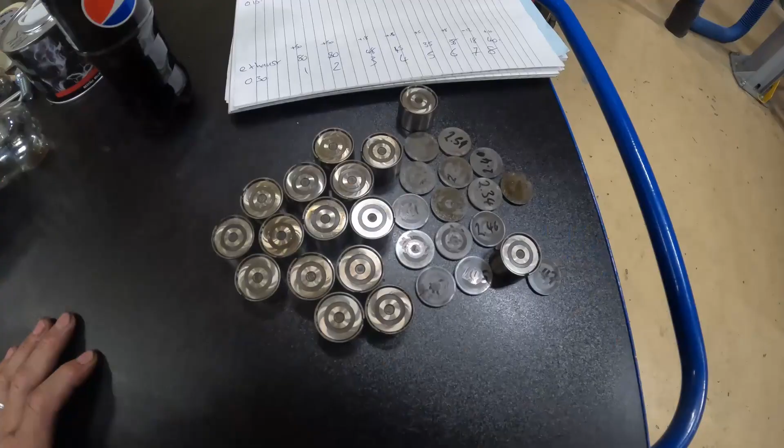So that's 2 steps forward and 1 step back yet again. So as luck would have it, I did take these buckets and shims with me when I replaced the camshaft. No camshafts were harmed in the making of this video.

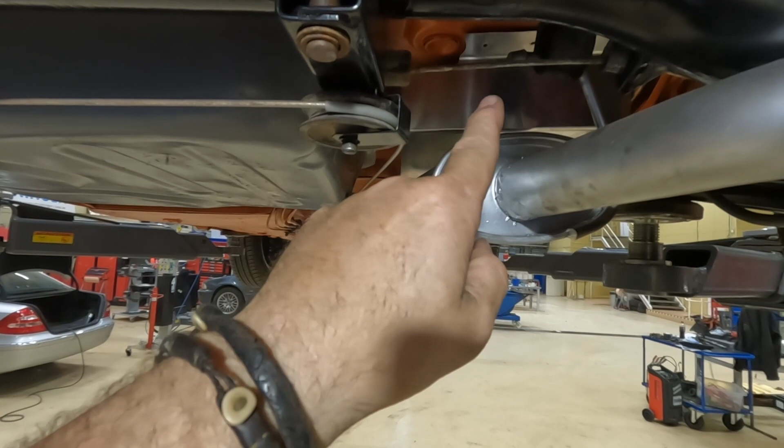So I'm going to start under the car, and I'm going to start with the pumps. A lot of people, including myself, have been annoyed at the fact that the pumps make such a big noise. I think you can see the low pressure pump there is bolted directly to the floor. There is a piece of rubber in between it, but it's still bolted directly to the floor and it's making a lot of noise. So what I bought is a set of these rubber cushions, grommets, whatever.

Now in hindsight, I probably could have gone a bit thicker on this and had one with a thread in the top. So you put a bolt in through the top into the rubber. I didn't really want to lower the pumps too much, so that's why I went for these quite short ones, but then they've got a really long thread. And as the thread comes up underneath the back seat, I need to fit it, and then I need to chop off the top part of the bolt so it doesn't stick up too much. Downwards doesn't really matter too much, but upwards is going to be a bit of a problem, so I'll need to cut that.

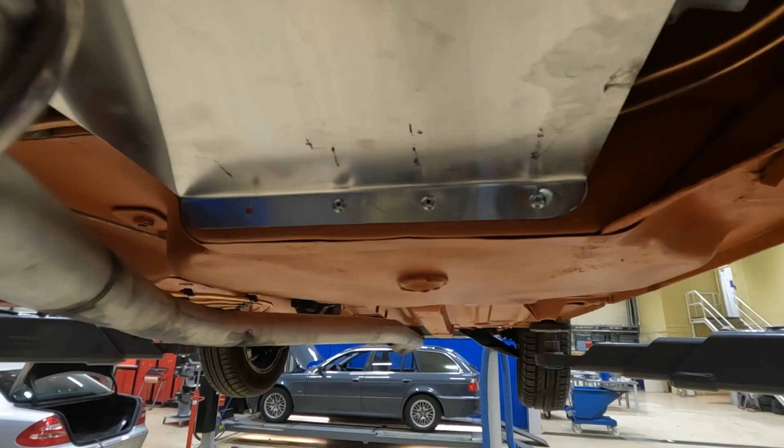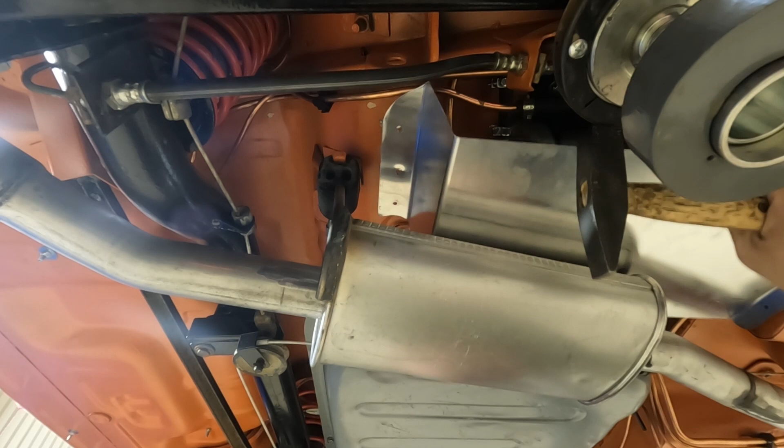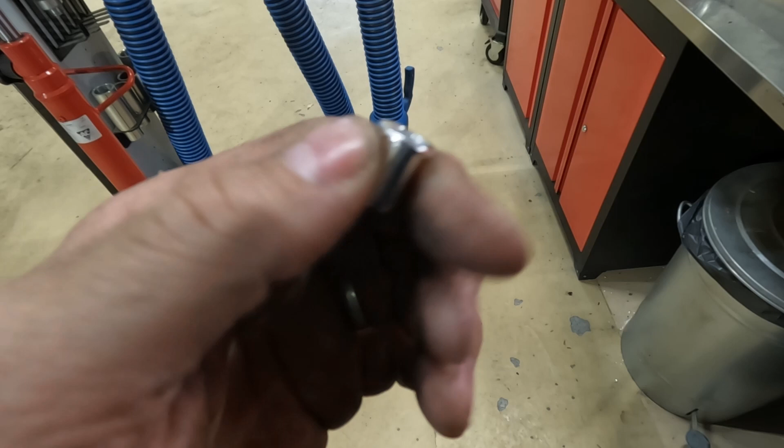So if you've never used a pop nut before, these are what they look like. These ones are made of aluminium, and you can get them in steel and stainless steel and all sorts of things, but they've got a thread in them there, which is an M6 thread in my case. And you fit these into the bulkhead and you kind of squash them basically. You put a tool on this end of it, and then you put it in the hole and you squash it together. It collapses here against the metal.

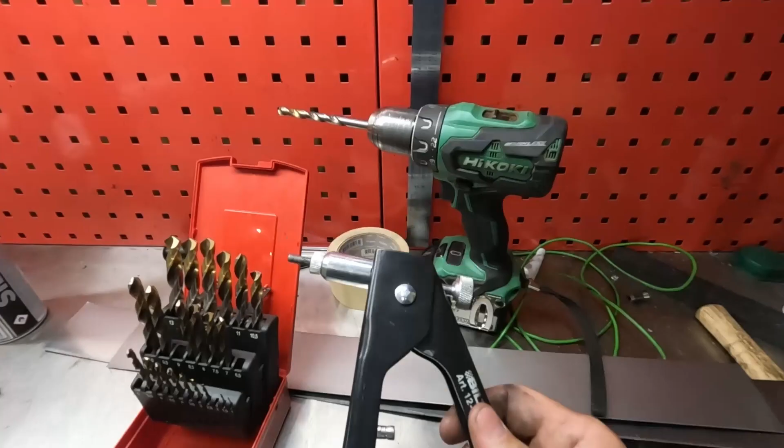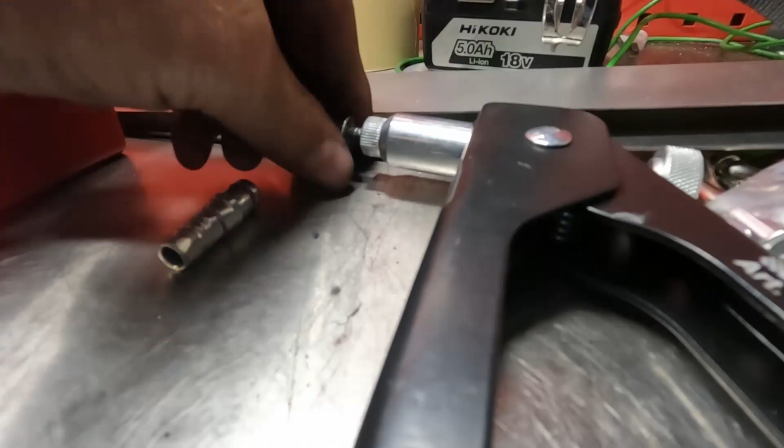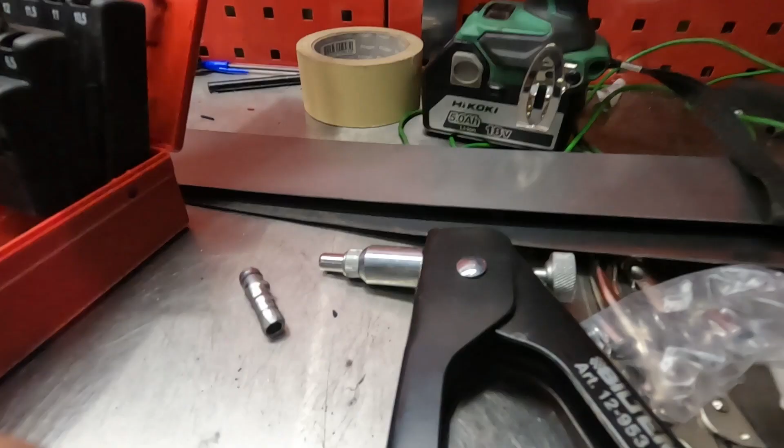So this is the tool that you use for it. You can change these heads out for different types of heads, depending on what thread size you're using. I'll screw that onto there. So it goes all the way to the bottom like that. Then when you squeeze the tool together, it'll crumple here around the metal in the bodywork. Once you've done that, this end of it is a left-hand thread. So once you've crimped it, you'll have a bit of play and you'll be able to unthread it, a left-hand thread, and that'll leave that in there.

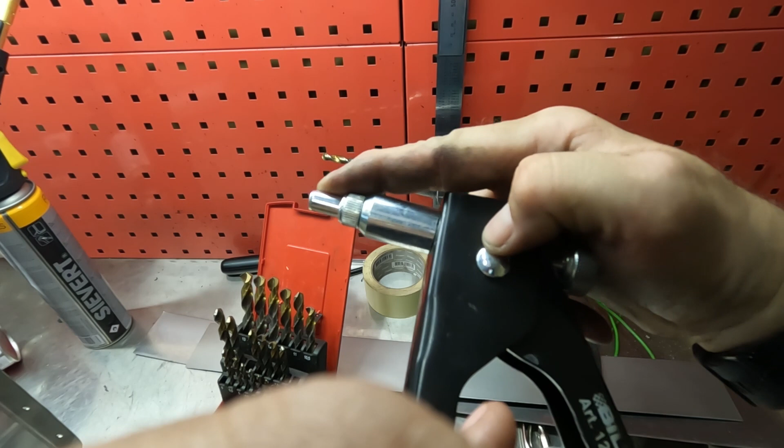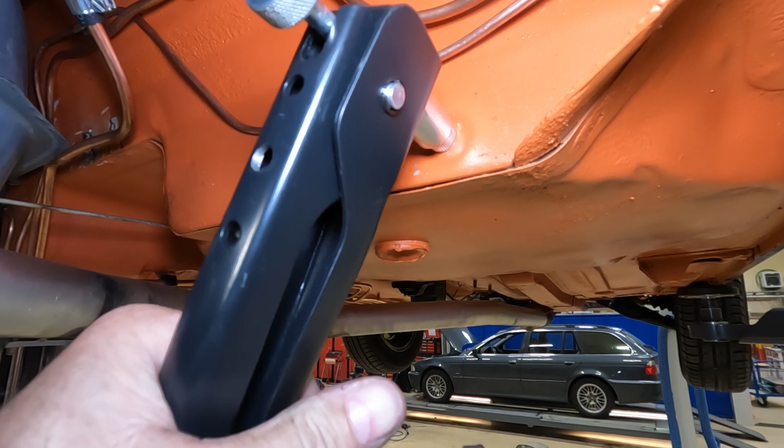I'll show you. That's the tool all nice and ready for it. It now fits in that hole, like so, and all you do is press it, squeeze it together, like that. Then when I release it, as you can see, there's a bit of a gap there now, so it means I can then unthread the tool, and there we go. So now we've got an M6 thread. Got 2 more to do. Right, so that's 4 there, and then the 3, and then the 3 at the back there. So that's now enough, probably more than enough to hold that little aluminium plate in place.

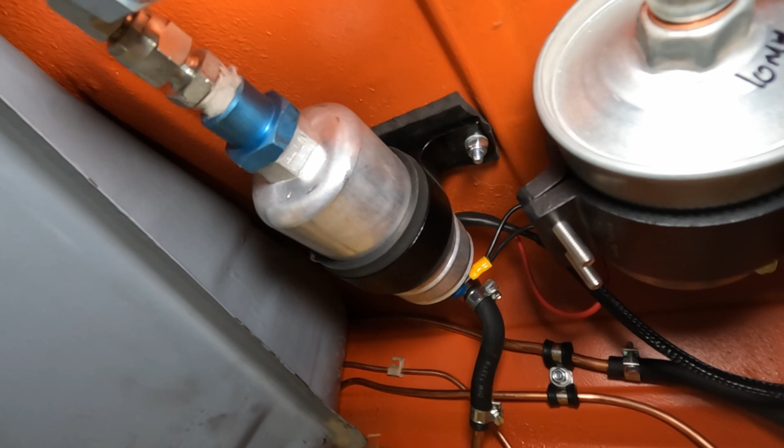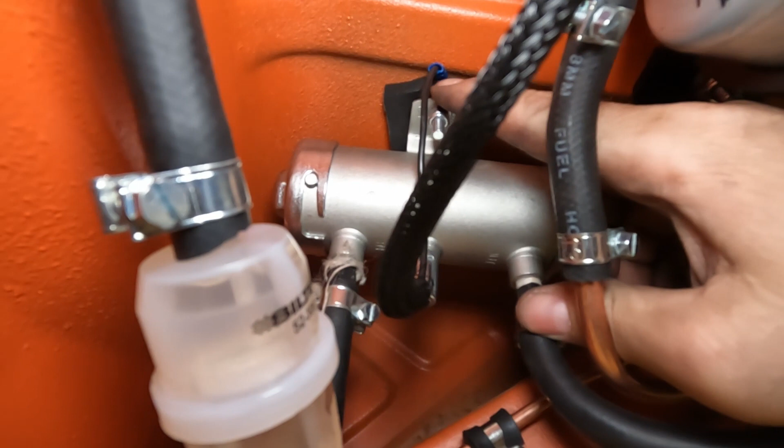So now I'm going to undo the pumps, and these are bolted through the floor, so I have to get somebody to hold the top side of it while I undo it, and then I'm going to put the rubbers in and then re-bolt it back up again. Right, so I've put these bobbins in there. I did decide to leave the thick rubber piece that I've got there. I thought it'll give it a bit more extra cushioning, so now that pump can wobble and vibrate. I think that's going to be alright.

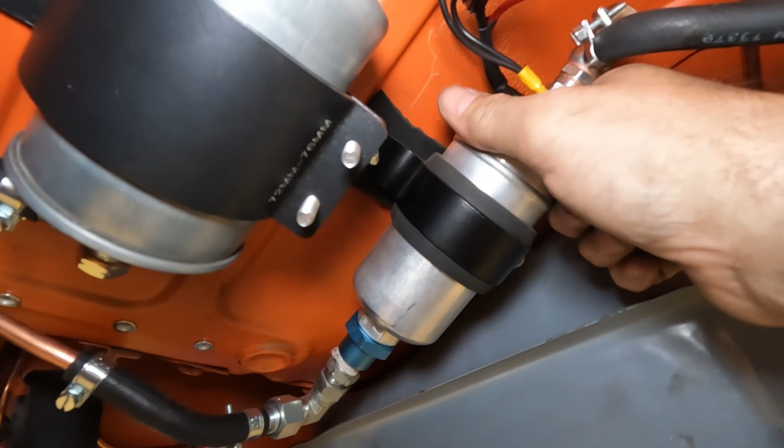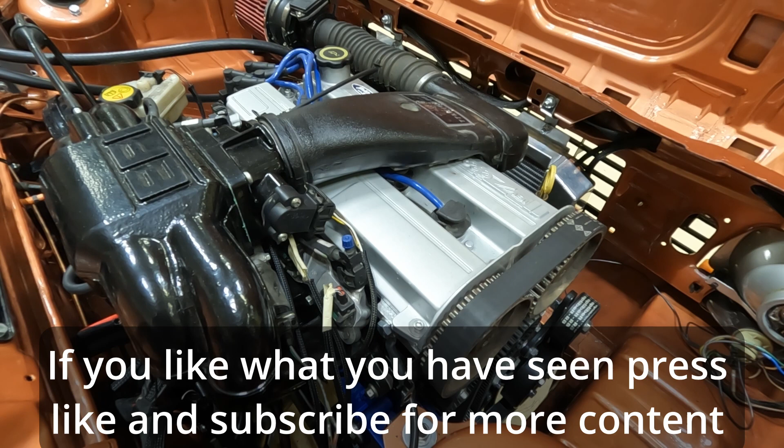And the same with the high pressure pump, that can now wobble around, and I think that'll take up the vibrations. But I can put the plate back in there and test it. No, I'm kidding, you can still hear the pumps, but it's not as bad as it used to be. It's a lot better. So the next thing that's been annoying me and everybody else that listens to this car is the ticking noise, and I think it's coming from the valves.

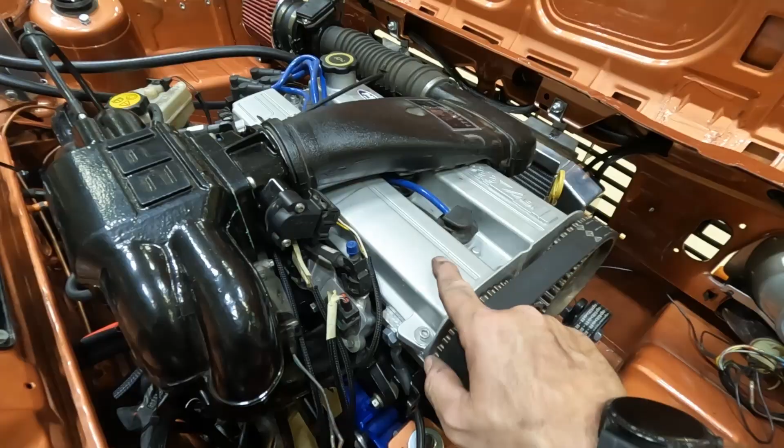I think it's coming from the tappets underneath the camshaft and above the valves. So I'm going to take the rocker cover off. I'm going to measure them all first and see what they're like, and then compare it to the data that I've got to find out what size they should be, and if they need adjusting, I'll try and adjust them.

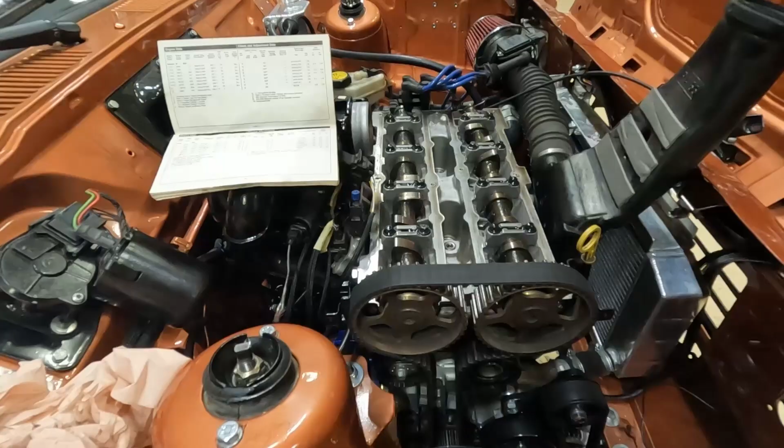Right, so the way I'm measuring these is I need to get each one of these lobes. So the top of the cam there is 180 degrees from the top of the valve, so there's the biggest gap underneath the valve and the bottom of the cam. And to turn this round, all I've done is a bit old school, like I used to do when we did Fiesta and Escort tappets back on the old engines that used to fit in these.

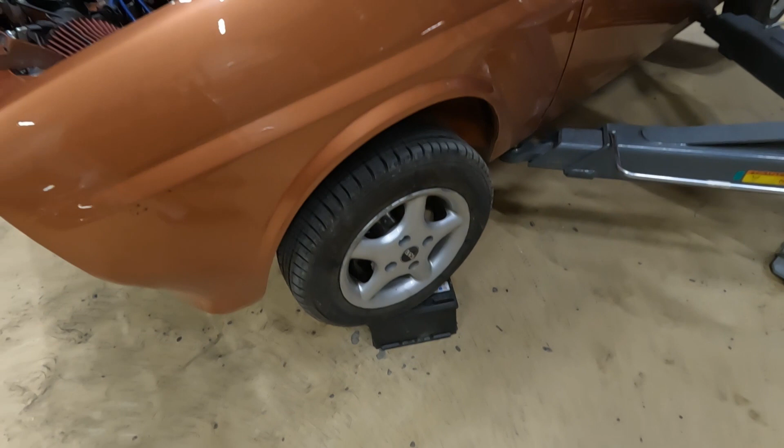Put a battery under that wheel, put the car in 4th gear, take all the plugs out, and then I can simply turn this wheel and all the cams move. Till I get round to these cam lobes. So we're looking at these two here now. So that is now 180 degrees away from that, and I can now measure the gap underneath that cam.

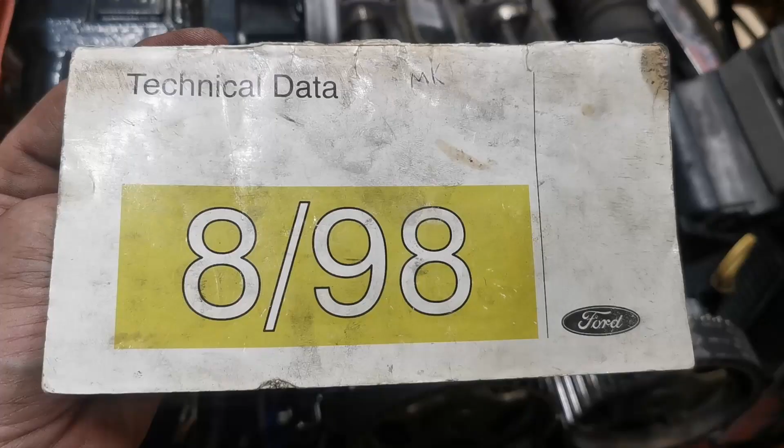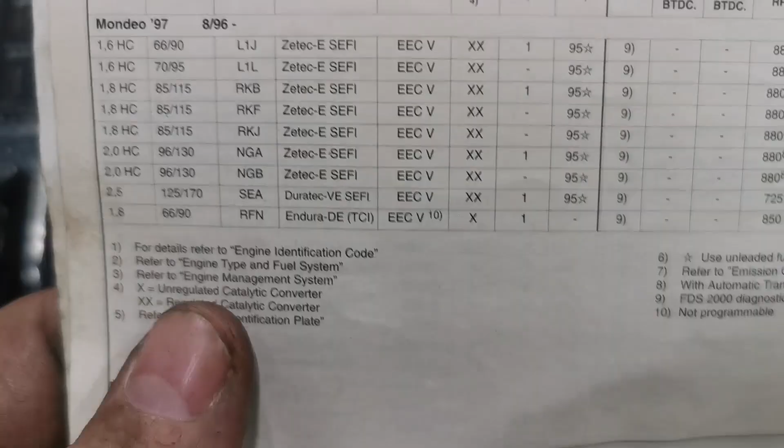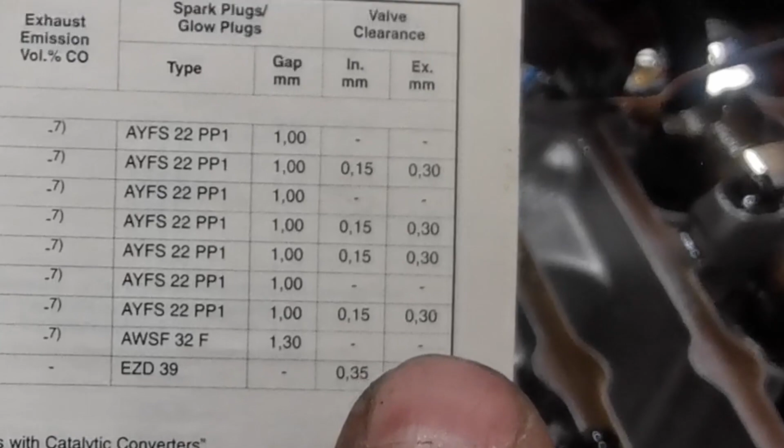Right, so I've got this book from 1998, as you can see, and it's from when I was working as an apprentice at Ford, and it's got loads of information in it, and one of the things it's got in it is the Mondeo 97, the 2-litre NGB engine. The inlet valves need to be 0.15 and the exhaust 0.3. So that's what I can now measure those to.

Now bearing in mind the exhaust side should be 0.30. Some of these are terrible. There's only like number 5 and number 6, which is number 3 cylinder, that are anything close to what they should be. Some of them are absolutely massive, and number 1 is ginormous. So I've got a lot of adjustment to do on this now.

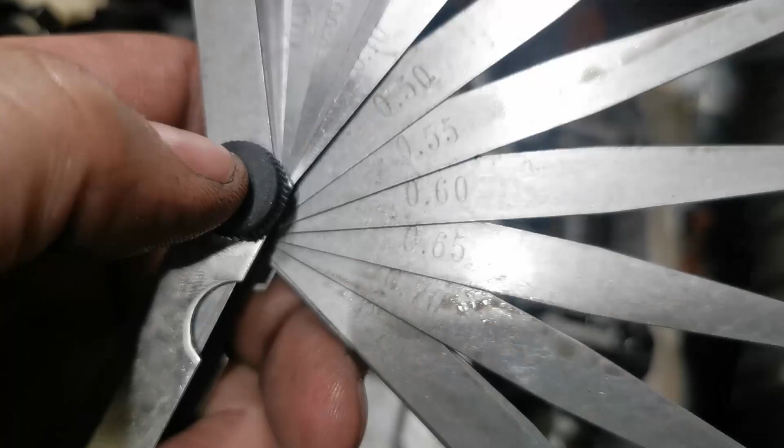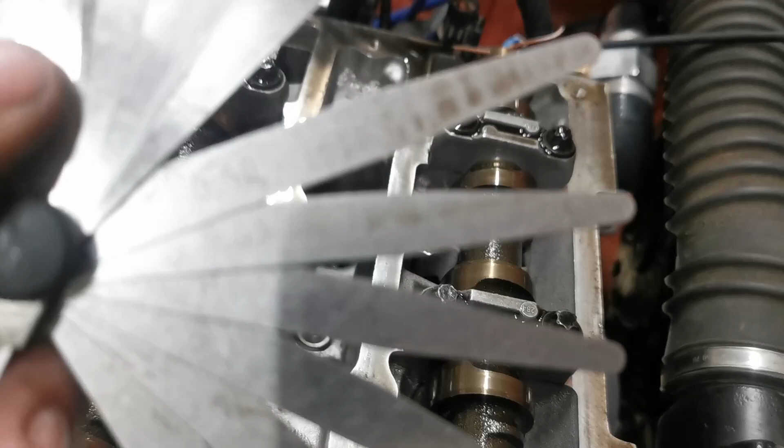So what I'm going to do now is measure the inlet side and write down all the measurements for them. So in this set I've got them divided up. So I've got 0.50, 0.55, 0.6, 0.65, 0.7, 0.75. So I can put them in and test when they get tight and when they get too tight. Then they've even got smaller blades, so let's say we've got a 0.5 there, and I add 0.03, then I'll know that that is 0.53, for example. So I'm going to go across all of these and measure all of these now.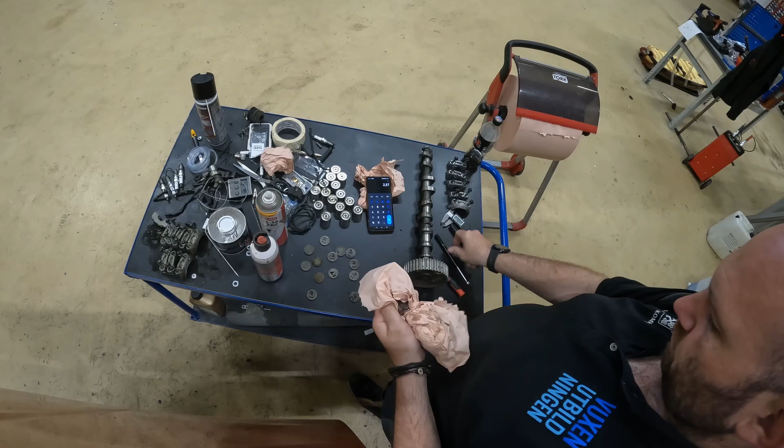So that's now the inlet side done, and they're also terrible. Bearing in mind they should be 0.15, most of them, and 3 and 4 is absolutely terrible. Okay, so this is the process that I used to work out which shims I need to get. So I pull each shim out of the engine with a magnet, clean it off with a bit of paper, because they're all covered in oil. So it's basically just to get rid of the oil off of each of the shims, make them nice and clean.

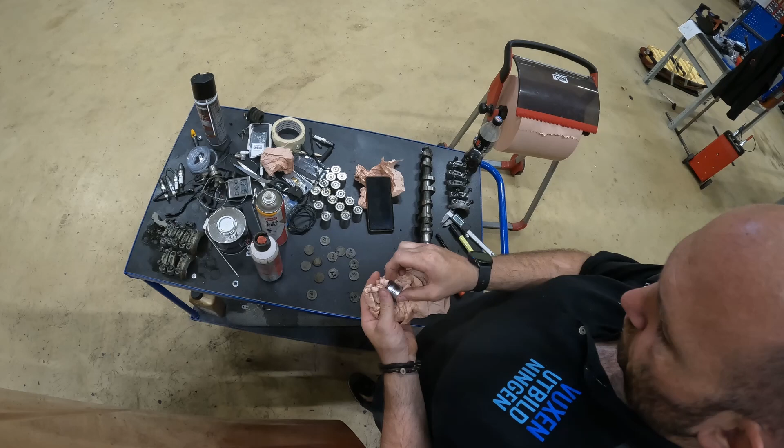And then I look for a little gap that's in the side of the shims, which is just there. And I'm using a bit of brake cleaner here just to spray, and it just breaks up the oil that's beneath the shim and the cup, and I can get a little screwdriver in there and I can just pry the two apart like that. Put the cup to one side, and again just wipe off the shim so that I can clean it all up, because I want to write on the bottom of that what the thickness is. Some of them it does actually say what's on them, but not all of them.

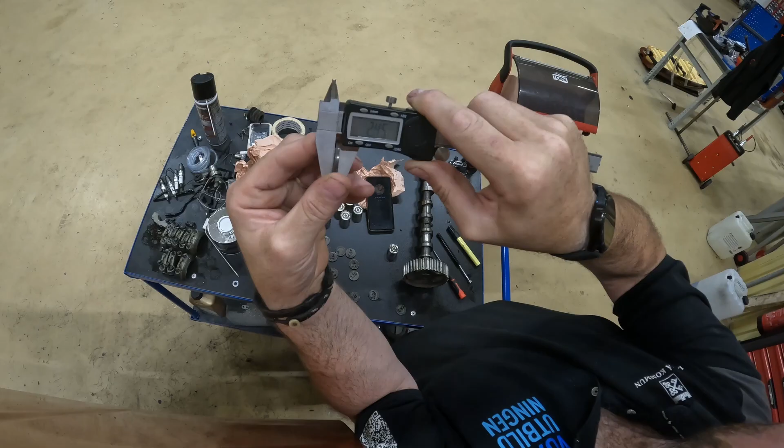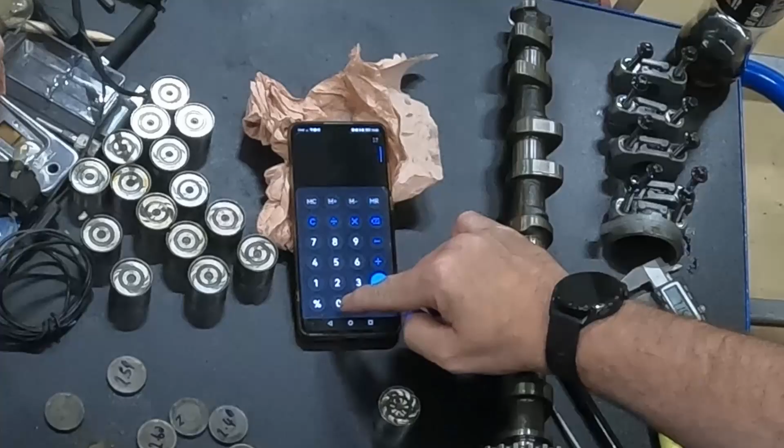So I'll just do a control measurement, and you can see on this one that it is 2.45 millimeters thick. So I'll just make a note of that with a pen on the bottom of it, so that I can use that one for later reference. So I now know that that one is 2.45 millimeters thick, so I'm going to add that into my calculator here. So we're putting in 2.45 millimeters, and then I need to add on the difference now that needs to be added onto that shim.

So I'll look at my piece of paper, find out what it needs to be, and we're going to add on 0.13 millimeters. Gives me the new shim measurement of 2.58. So I need to find the shim that says 2.58 on it, put that back on the cup, and that shim is ready to go back in the engine. And we do the next, and the next, and the next.

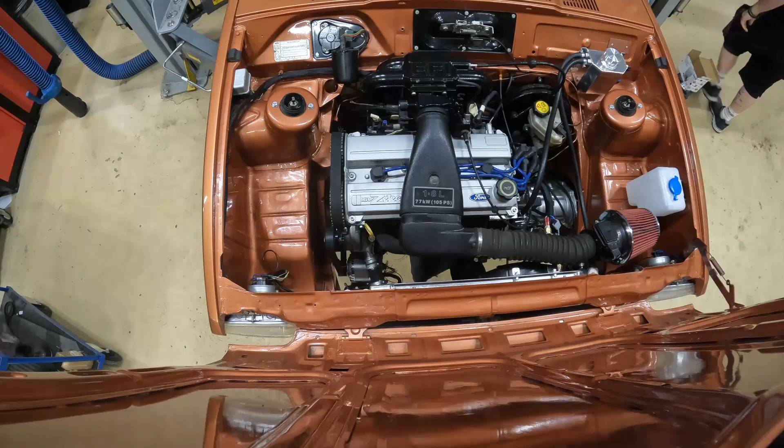See if this starts then. See what it sounds like.

Right, so that's the tappet set, and the engine sounds a lot better. There is still a ticking noise, which I'm kind of expecting there to be, but I think that is coming from the injectors. You'll always get a bit of a ticking noise from the injectors, especially on these engines, but it sounds a lot quieter.

So now I've got a couple more things to do. I need to sort my seatbelts out. I can't seem to find them, so I need to find them. I need to sort out the tank sender, because I don't know how much fuel I've got. I need to also sort out the indicators that aren't working for some reason, don't know why. So we need to find out what's wrong with that, and then we can take this for a proper test drive.

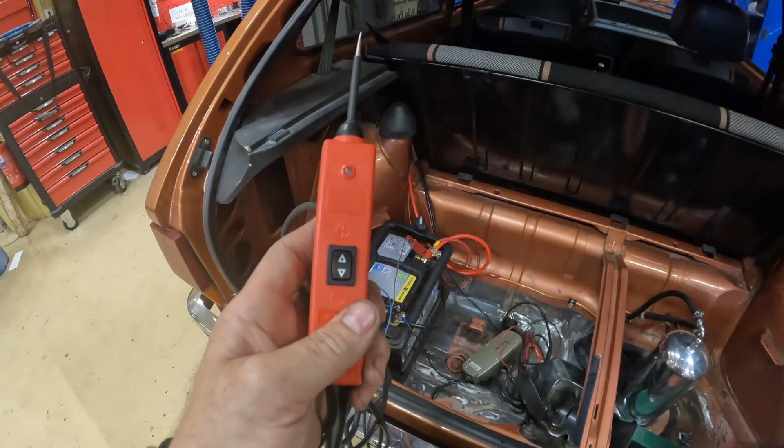So we're going to start off by checking the cables at the back of the indicator stalk to see whether I've got lives and earths, and to see if I can power up any of the cables to see what the problem is, and we'll see what we can do. I know that the hazard's working, but the indicators on the stalk aren't working, so I have to find out what's wrong with them. And we're going to start off with one of these tools, which is a tester tool.

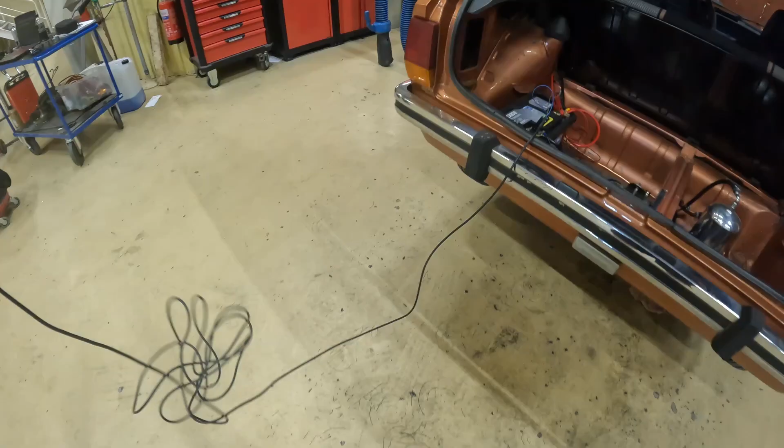Really useful. You connect it up to the positive and negative of the battery, and then I can add power, or I can add an earth to things. I can also test if there is a power or if there's an earth there, and it's got a built-in fuse here. So really useful tool. It comes with an enormously long cable. So I'm going to see what I've got for power and earths to the back of the switch, and try and find out what's wrong with it.

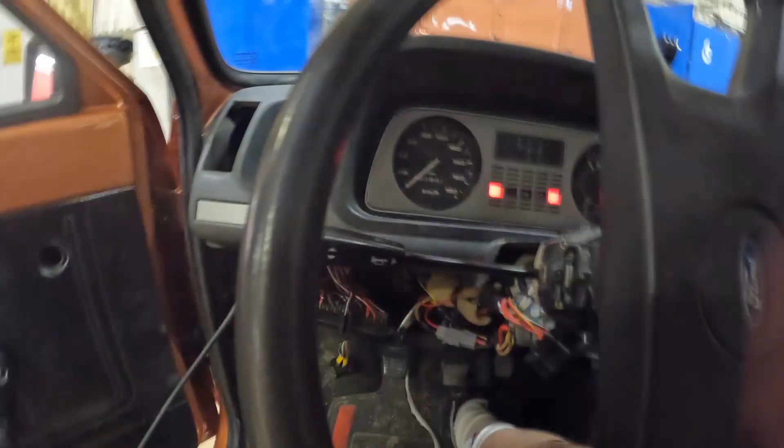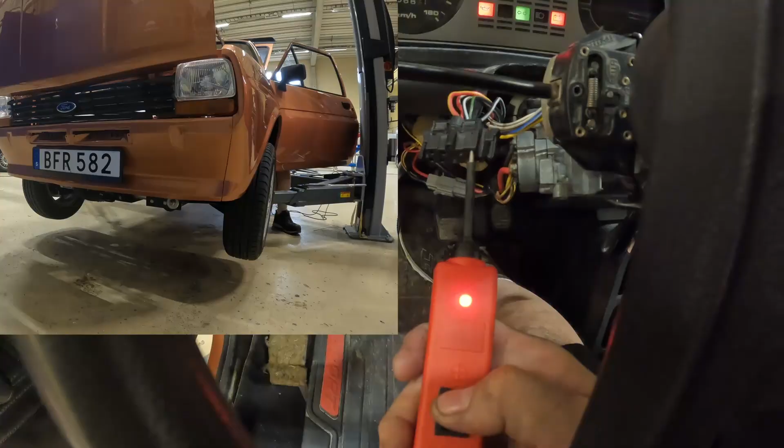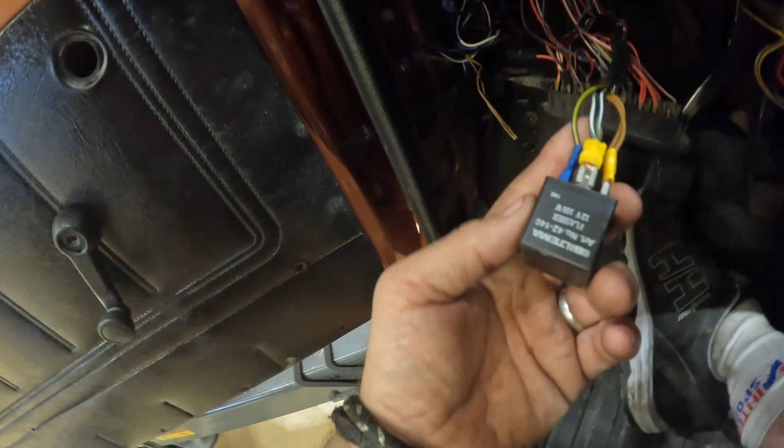So basically what's happening with the ignition on, I'm not getting any indicators, but I am getting the hazard lights. So I don't really know quite why. So with the test tool, I can put the cable on the wires and I can test that the wires are working. But eventually I've traced it down to what I believe to be a dodgy contact on the relay. This one especially, which is the power from the hazard light switch, didn't seem to be very tight on the relay. So I've cut the plug off, put new plugs on it, and it seems to work now. So now I've got the indicators working again.

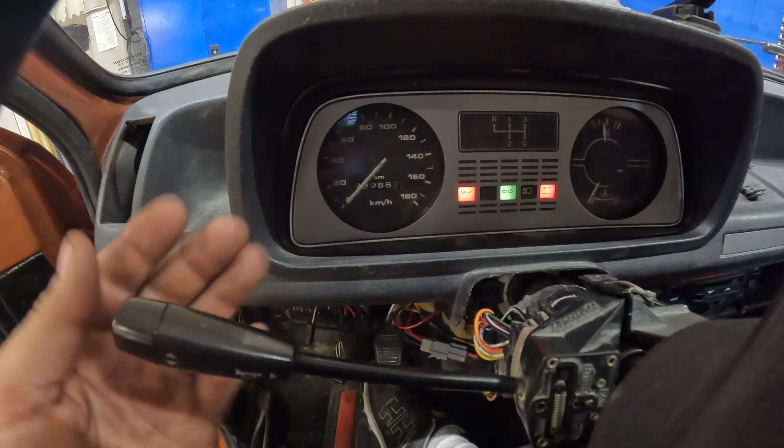I took the rear bench out to paint the rear back, the metal part of the back seat. When I took the rear bench out at the bottom there, I found the cable wasn't connected to the tank, and I also found all the parts to the seat belts that I was looking for. So now I've got seat belts and I've got a fuel gauge. So that kind of means that the car is now legal enough for me to take on the open road. I have been driving it on a private road beforehand just to get the car tested, but now it's time for me to take it for a proper road test.

The fuel gauge is saying almost empty. I don't know whether that's the fuel gauge not reading properly or if it is actually empty in the tank. So I'm going off to the local fuel station, which is nearly 9 kilometers away from here. I'm going to fill it with fuel to see if the fuel gauge is working or not.

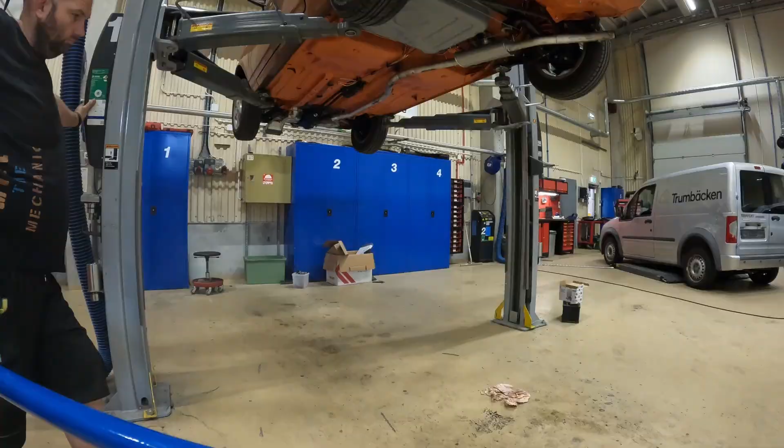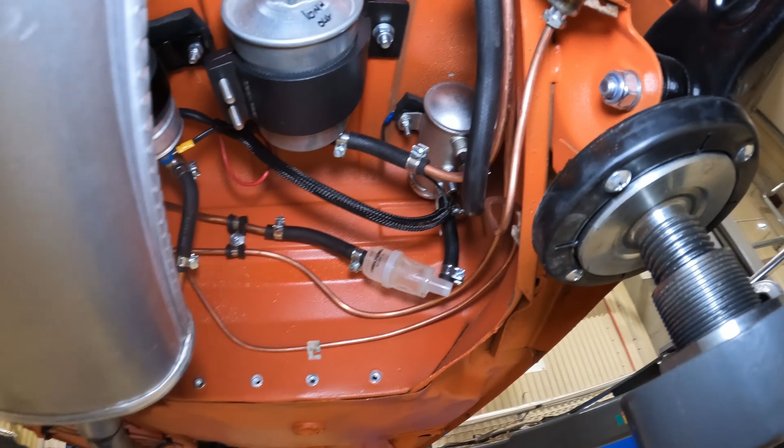Right, I'm back from my road test. I drove 9 kilometers there and got towed 9 kilometers back again. As soon as I came out the petrol station, I turned right and that's where she died, basically. And from what I could kind of diagnose at the side of the road, the low pressure fuel pump has died. Stopped working. Right, so I took the cover back off again, and it looks like the low pressure pump has definitely died. It's not making a noise.

I've took the power probe and put it on the power cable here. Now the high pressure pump does start, the low pressure pump doesn't. We've checked earth, it's got a good earth, so the pump has died. So now I need to get a new pump. Happy days. So that's 2 steps forward and 1 step back yet again.

So I think I'm going to end this video there and I'm going to go on holiday. Well, we already had a holiday planned, but I'm going to go on holiday now anyway. So I'll be sorting this out in a few weeks' time when I get back off of my holiday. During my holiday, I'm going to find a new fuel pump for it.